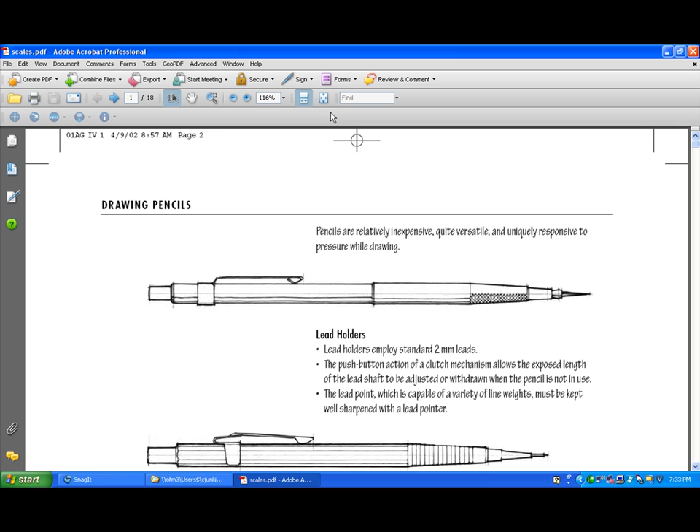No semester in technical drawing would be complete without some discussion of scales. And I've gone online to pick up some teaching information that we can use as a guideline, and I'll add to this information as we go.

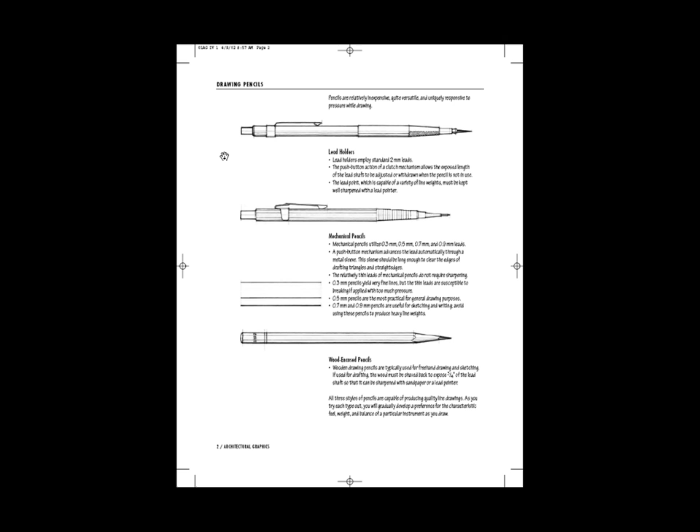The start of this particular PDF file that I found has to do with drafting equipment from board drafting, because reading scales is the one thing that we really have a tougher time doing via computer. Probably less tough now with a lot of the drawings staying on the computer as far as being able to scale them off at full scale.

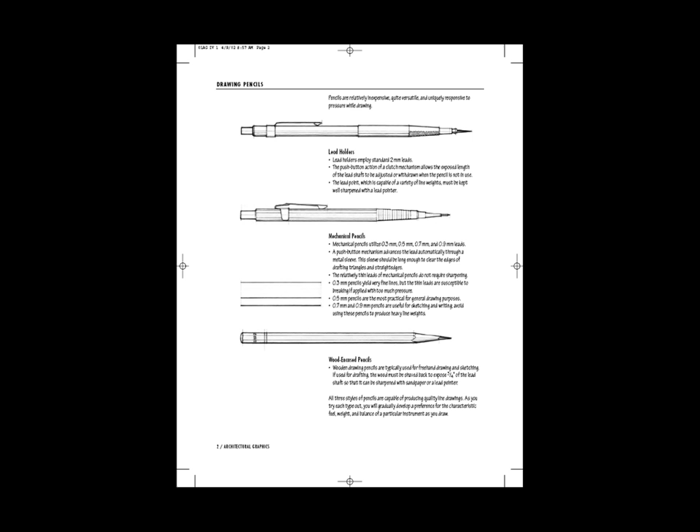But when we have a printed piece of paper and somebody does print out a plan, just like our field hockey project that we did, which is 1 inch equals 30 feet, eventually that's going to show up on a piece of paper, 11 by 17. It's printed out at 1:1 on the 11 by 17, and then you would use a 1 inch equals 30 engineering scale to determine lengths and widths that either aren't dimensioned or you just want to verify how things look.

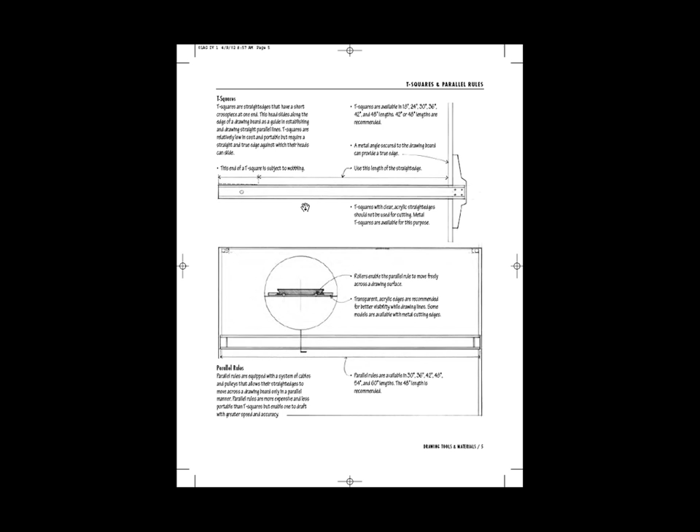This particular one also talks about lead weights, and technical pens. We don't want to deal with those anymore. So styluses and T-squares and parallel rules and triangles, 30-60s and 45s, and adjustable triangles, templates for symbols, compasses, beam compasses, electric erasers, eraser shields, drafting aids.

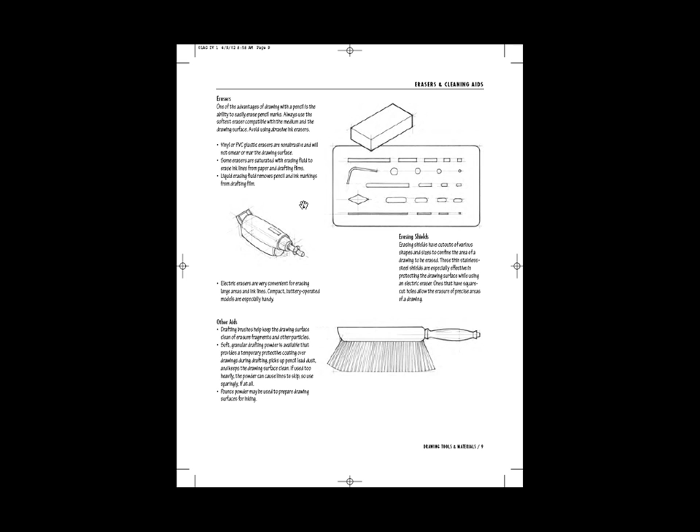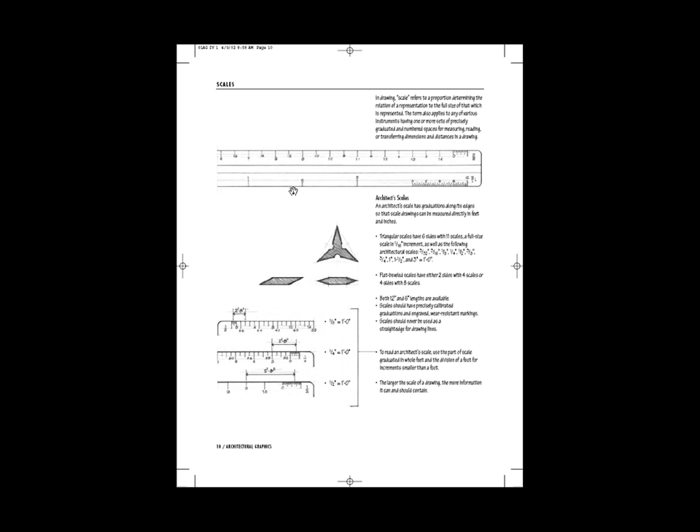Now we get into scales, and we'll start out looking at an architect's scale. You can see at the top we have two scales. I'm going to see if I can zoom in on a piece of this. There we go, that's good. And you see we have a 3/8 inch scale on the top and 1.5 inches on the bottom. 3/8 scale means 3/8 of an inch equals 1 foot 0 inches.

So if this is 3/8, then we notice that the increments down here are 1 through 12. So each of the increments within each 3/8 of an inch equals 1 inch. If I were to draw a line, let me see if I got some tools here, here's a line tool. We always, on an architect's scale, start at a whole number on the left.

Now, with architect scales, we're actually reading the scales from two directions. There's a 3/8 inch scale on this side. There's actually a 3/16 inch scale starting from the other end. So the smaller numbers here indicate our 3/8 scale. So if we go out here to the 10 mark, and I'll just draw a line, and we'll stop right about there. The length of that line would equal 10 feet 4 inches.

And you might say, well, no, it looks closer to 10 foot 3.5. Really, when we're looking at scales this small, that's about as close as you're going to get. Let's do another line, and we'll start out here, go down to about here. And this line would read 14 feet 7, maybe 7.5 inches. So 14 feet dash 7 space 1/2. 14 feet 7.5 inches. And it really needs to be written out that way when we're doing our drawings or looking at these dimensions.

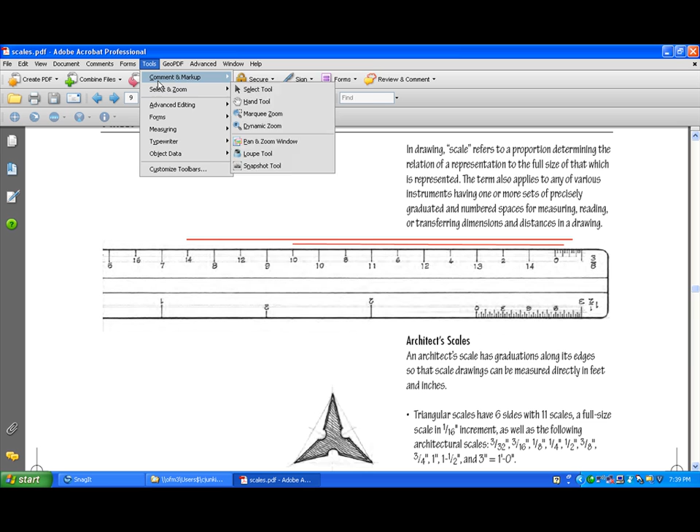If we draw a line from here to, I'll just drop it right there. Now this is 0, this is 1 foot, 2 feet, 3 feet. So it's going to read about 3 feet 7 1/2 inches. And that's about as close as you're going to get to it.

You can see it shows a triangular shaped rule down here and some flat rules. Normally we see the triangular shape. The 6-sided ones will have 3/32, 3/16 equals a foot, 1/8 inch equals a foot, 1/4 inch equals a foot, 1/2 inch equals a foot, 3/8 inch, excuse me, 3/4 of an inch equals a foot, 1 inch equals a foot, 1.5 inch equals a foot, and 3 inches equals a foot.

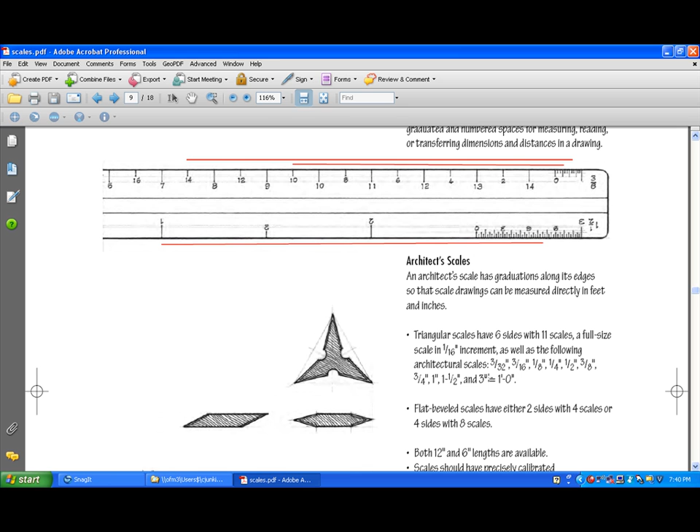So if we've got a 6-sided scale, we have 2 scales on each side of the ruler. 1 through 10. And on some of them you'll also see just a regular ruler on one of the sides. So those are the normal ones you would see.

Down here we see some other architectural scales. First one we see is 1/8 inch equals a foot. If we see a line that is here, start at the 12 and work our way back. Whoops, sorry. Too quick on the button.

Crap. Let me delete that. It keeps trying to grab it. There we go. And we'll bring this down to about here.

You can see in here we have each dash mark in this last foot equals 2 inches. 2, 4, 6, 8, 10, 12. So this would equal 12 feet, 4 inches, right to this point. Now that's reading from right to left.

Now you can see down here on the opposite end of the scale we see the 1/4 inch equals a foot. So if we take another line and we'll come out here, you can see that the 1/8 inch goes all the way up to 96 feet. We're reading the bigger numbers down here, so we have a line that goes from here to say here.

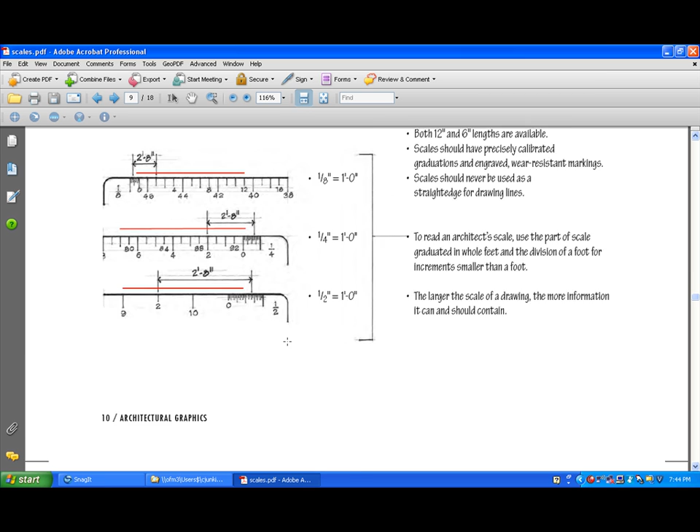Now let's look at the engineer's scale. First thing you notice is no longer are we dealing with increments of 12. We're dealing with increments of 10. 1, 2, 3, 4, 5, 6, 7, 8, 9, 10. And the first scale we see here is a 10 scale.

The interesting thing about engineer's scales, using base 10, this scale could mean 1 inch equals 10 feet. It could mean 1 inch equals 100 feet, or 1 inch equals 1,000 feet. So you can see by this example that 12 feet, 1 inch equals 10 feet. This distance from here to here would equal 12 feet.

If we just added a decimal place to it, or another digit, and determined that this was a 100 scale, because we're in base 10, we could say this 1 inch equals 100, 110, 120. If we said 1 inch equals 1,000 feet, we could say 1,000, 100, 200, 1,200 feet by using this one scale.

So depending on what's written on the drawing, if it says 1 inch equals 100 feet, you would know that an actual 1 inch distance would equal 100 feet, and this distance would be 120. And you can see that with this scale, we always start the line at the 0 point and work out, and whatever our remainder is, we just read it off in increments of base 10.

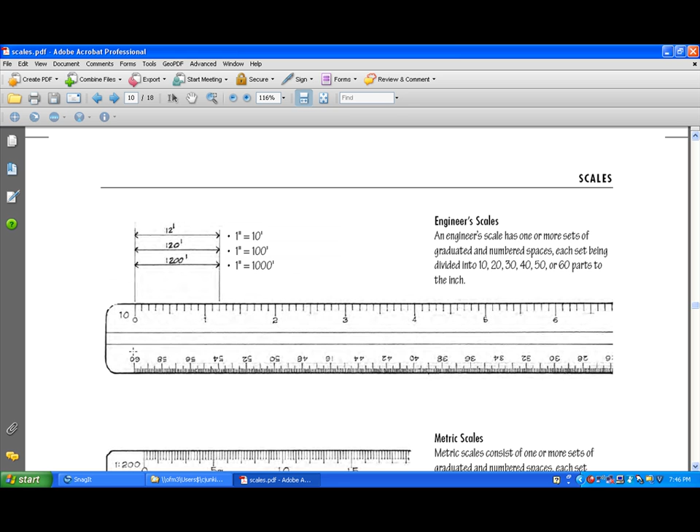You can see how this lines up with the 1 inch. We know that the distance between here and here is going to be 50, or increments of 5, and we'll see it's easier when it's read off the 0 side.

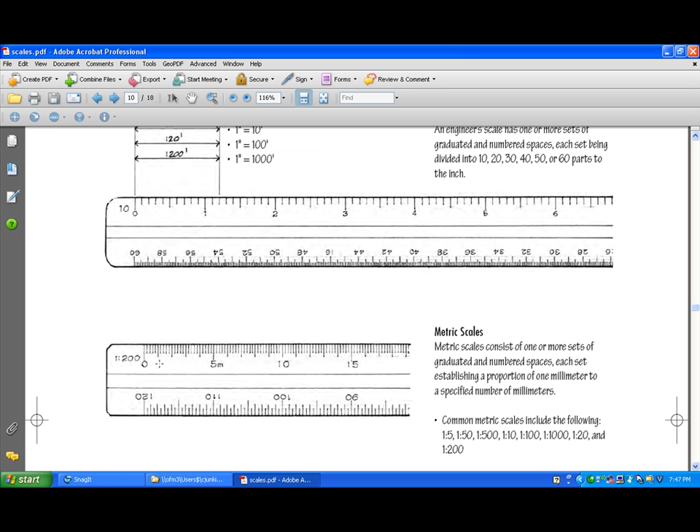Metric scales, same type of thing, except we're working in centimeters, and each of these little divots here would be a millimeter. So there's a centimeter and a millimeter, the big hash mark being the centimeter, and then the small hash mark being the millimeter. Or two, however it is, it's the same type of thing. It's a base 10, so it's 1 to 200.

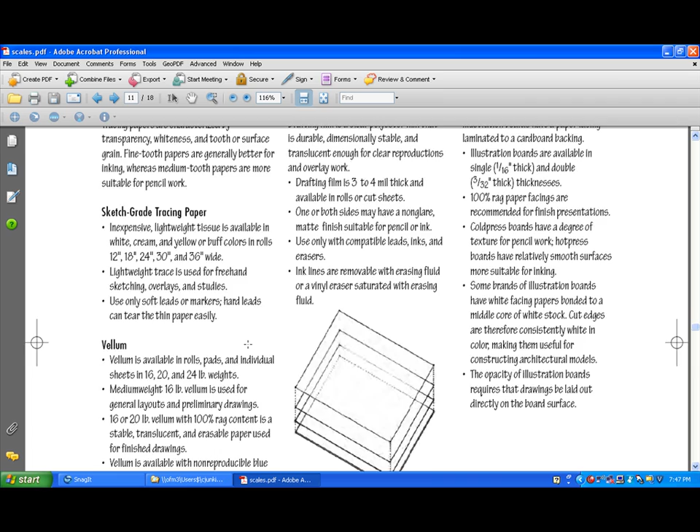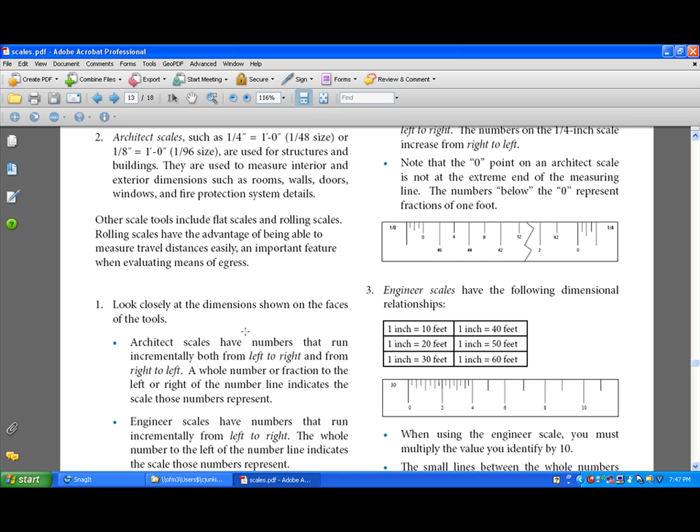We don't get into these too much, and we don't need to talk about paper and vellum and films, but I do have some other information on scales, and we're going to work on some things. Oops, there we go. More information.

Engineer and civil scales such as 1 inch equals 10 feet and 1 inch equals 50 feet are used to measure roads, water mains, topographical features, anything large scale. Architects' scales are used to measure structures and buildings, interior measurements. They're in fractions. They're more accessible when you're talking with carpenters that use feet and inches and fractions. That's why we deal with that type of scale when we're talking architectural work.

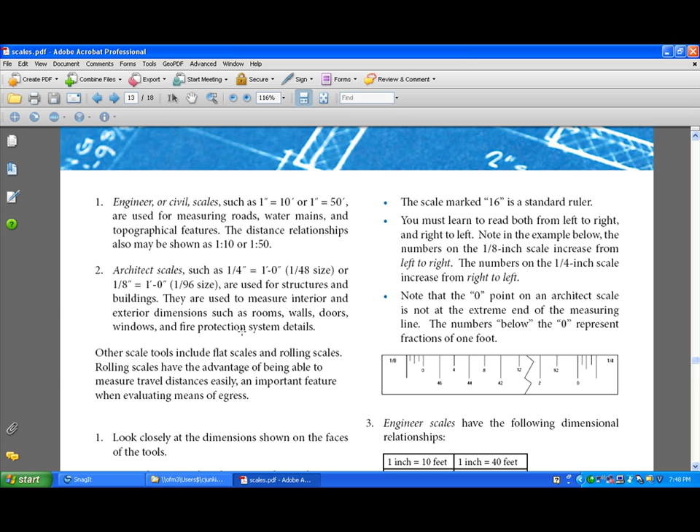And as we look down through here, they talk about the same type of things. I think there's some other information. There's some questions and answers that we're going to go through a little later on that I may incorporate. I think there we have some scales.

Now I have actually photocopied some scales, and I'm going to hand them out to you at full scale, so you don't really need to buy them. I know that budgets are tight, so I photocopied full-size scales. We've got some examples here of some scales.

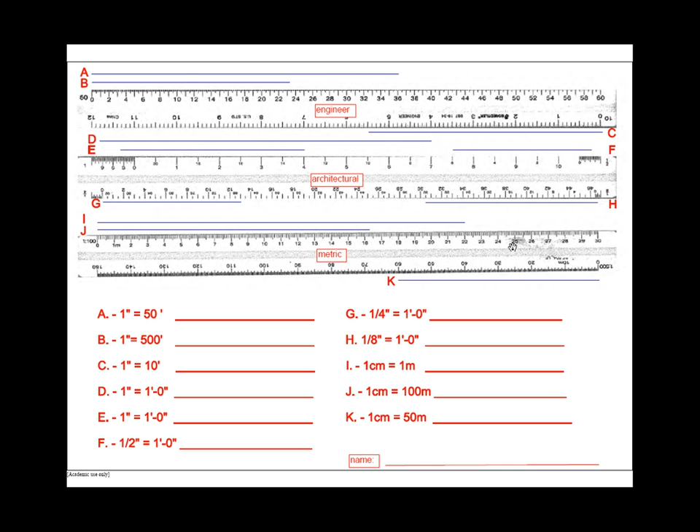So using that information, you can pretty much take any scale that's based on either 1 inch or 1 centimeter and interpolate it into another scale by just using a multiplication factor based on what it is. So it's not hard to do.

As we talk about this in class, I'm putting together some of this to be used as part of a little quiz we're going to hand out probably on Wednesday. That will include some scale reading. I'm going to put together some of this information along with your scales that I'm going to hand out and ask you to provide the correct reading for some different line lengths that we're going to show you on the drawing. So keep that in mind.

Again, I'll be handing out the scales and we'll be talking about it in class, but if you're familiar with reading scales and doing this type of work, it's pretty easy. I've done it so long that I don't think about it too much anymore, but you can see I struggle with the metric a little bit, but that's just because we don't use it that much in this area. So it's easy to work with if you practice at it a little bit, just like the CAD work.

So hopefully this has made some sense to you, and we'll talk about it in class on Monday, going through the same stuff and looking at different scenarios.